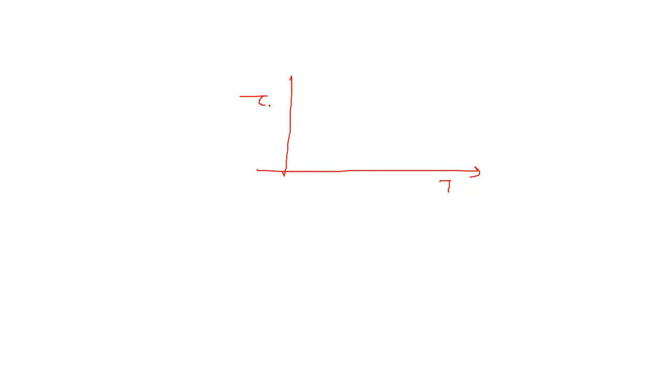One question is there regarding the previous question: if slip does not happen at room temperature, how is the deformation occurring? It's not that slip is not occurring at room temperature. Slip occurs at room temperature, but the number of independent slip systems, I will show you how the tau CRSS changes on this slide. So let's consider a graph where this is temperature and this is tau CRSS. Usually the curve will be like this.

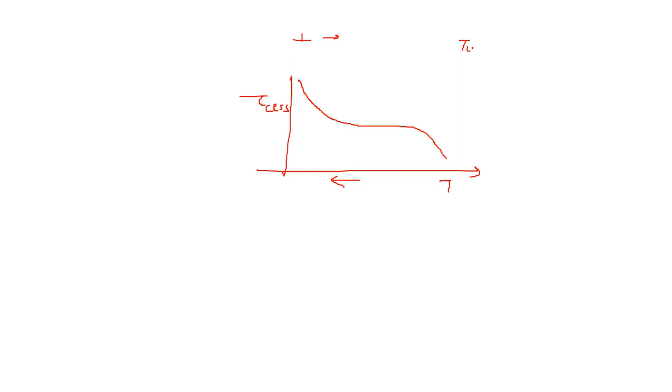So as you go towards very low temperature, I am not talking about room temperature, I am talking about very low temperature, just above absolute zero, like 100 Kelvin or so. What happens at sub-zero or cryogenic temperatures is the tau CRSS required to cause the deformation by slip. There are basically two types of deformation: one is by twinning and the second one is by slip.

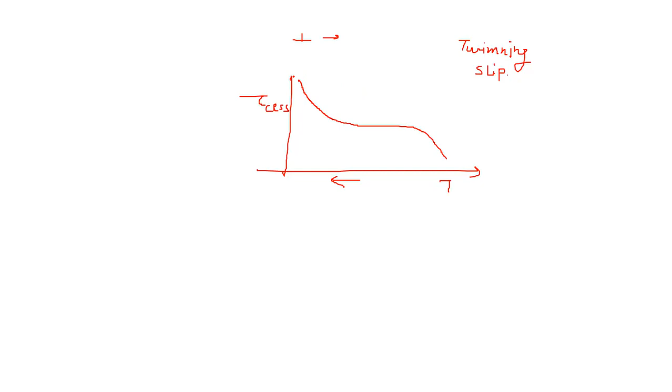Because this tau CRSS is very high, and this is the stress required for twinning, which is ideally flat. At any temperature the stress won't change. So this is tau for twinning, and it is constant. At a particular temperature, tau CRSS is higher for slip than twinning, so the material tries to deform by twinning. As you go on increasing the temperature, tau CRSS falls below twinning. Hence more and more independent slip systems get activated, which homogeneously deform the material.

So the room temperature will be somewhere here, T room temperature. In some materials this crossover happens above room temperature, and in some materials below room temperature. In FCC this is the case, whereas in HCP, let's say in magnesium, you will find more twins in the microstructure, because at room temperature there are not many independent slip systems active, hence another mode of deformation is also taking place, which is twinning.

Hence at room temperature slip occurs, but I am talking about low temperatures, cryogenic temperatures, not room temperature. I hope this is clear.

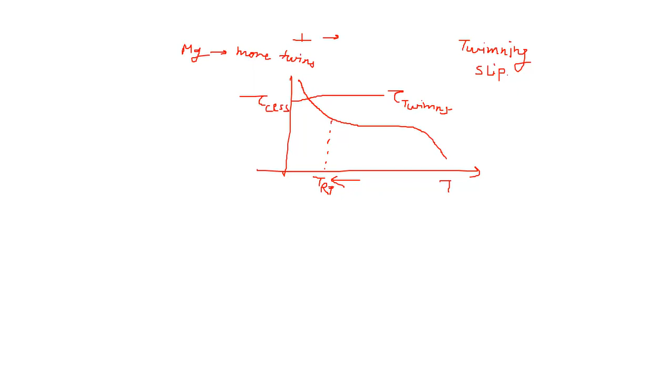Okay, any other question regarding the previous question? Otherwise we will go to the solution of the next question. Okay, so we will go to the solution of the next question, which is on creep. So I think if you are in final year or so, you may be knowing regarding creep, what is creep and everything. Let's again start with this.

This is question number 19, GATE 2016 Metallurgical Engineering. Creep resistance decreases due to: A. Small grain size, B. Fine dispersoid size, C. Low stacking fault energy, D. High melting point. So firstly, what is creep? Creep is defined as time dependent deformation at elevated temperature and constant stress.

So let's say we have a material, we are keeping it at a temperature T and we are applying uniform stress, let's say compressive here. Let's say P is the load applied, which is generating compressive stress throughout this cylinder, and we are holding it at time t. So even if you are below the yield stress, this material after a long time will try to deform or relieve the stresses caused by this load. Hence, this deformation caused by a constant stress at a higher temperature is basically creep.

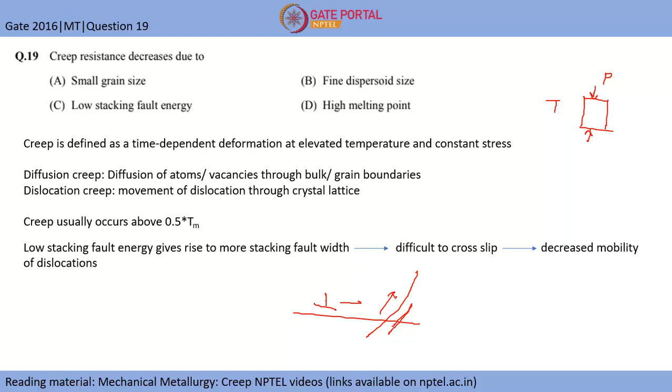And let's talk about low stacking fault energy. In dislocation creep, one dislocation is moving in a certain plane, and it has some hindrance here, so it cannot move. So it can cross slip to another plane and try to slide there. Using cross slip, dislocations try to move away from any hindrance and give plastic deformation by their movement.

So what happens when low stacking fault energy is there? It gives a larger stacking fault width. If the stacking fault width is larger, it is difficult for a dislocation to cross slip. Hence, decreased mobility of dislocations. If there is decreased mobility of dislocations, creep resistance will increase, not decrease, because for creep resistance we should hinder the path of dislocations. Hence, C is also not the option.

Now coming to fine dispersoid size. Let's say we have one dispersoid here, and all of this is a matrix, and one dislocation is trying to move on this slip plane, where it encounters a dispersoid. So it will have some hindrance in its movement. It will try to shear the dispersoid, if you have studied this, or it will try to just go around this dispersoid.

So this fine dispersoid is creating more hindrance to dislocation movement, which is basically increasing the creep resistance. Hence, fine dispersoid size is also not a correct option. And smaller grain size. Let's consider that I have a structure like this, where these are different grains, and one is with bigger grains.

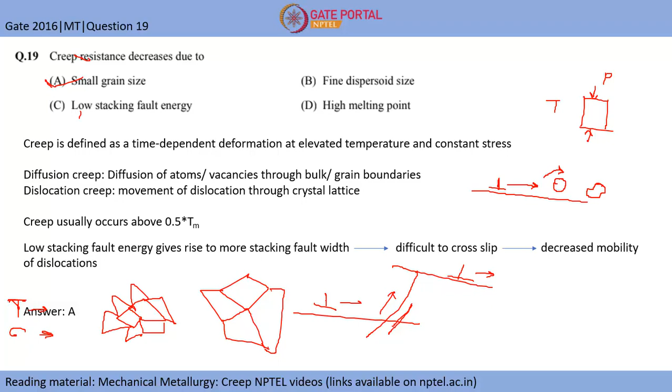This is fine. You have any doubts on this question? What about D option? Okay. Yeah, that's what I was saying. Like D option is high melting point. Let's say I have two materials.

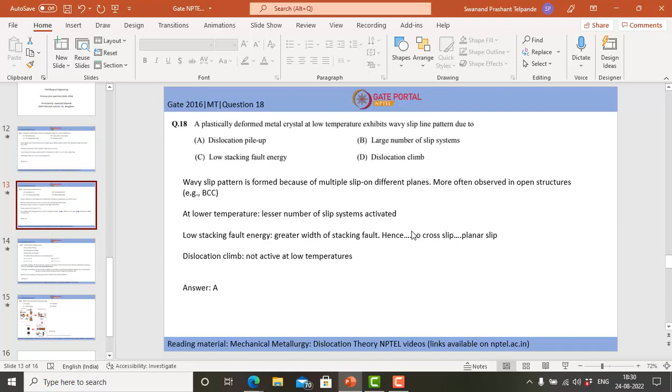Just a second. Are you able to see my screen? Hello? Hello? Yes, sir. Can you see my screen? Yeah, I guess now you can see my screen. Some problem is there. Okay, I will just try to answer verbally.

Let's say I have a 1000 degrees Celsius temperature. Now I take two different materials where the melting point of one is, let's say, 1400 degrees Celsius, and another one is 2000 degrees Celsius. So there are two things. One is creep is basically an accelerated process at higher temperature. So if you consider 0.5 Tm, 0.5 Tm of one material will be 700, and for another one will be 1000.

So if we consider these two materials, according to you, in which material will creep be faster? Where 0.5 Tm will be 700, or where 0.5 Tm will be 1000? Obviously where 0.5 Tm will be lower, let's say 700, because we are keeping both materials at 1000. Hence the higher the melting point, the creep resistance of that material will be increasing at a particular temperature. I hope this is clear. Is this clear, Chintu?

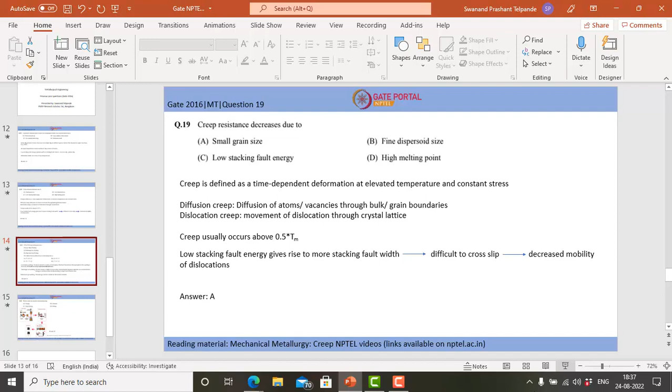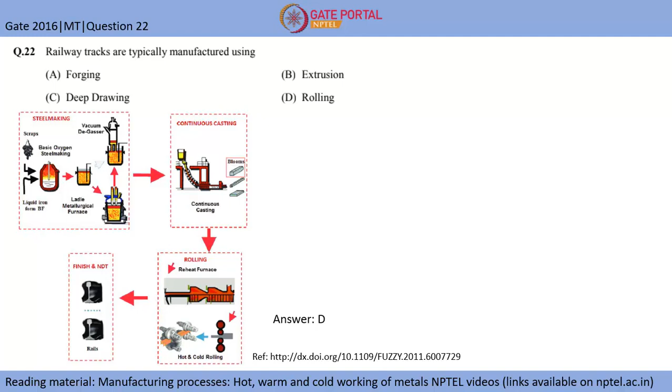Hence the correct answer is rolling, which is the manufacturing technique mostly used to manufacture railway tracks. And many of you have suggested that extrusion is also there. Even forging can manufacture railway tracks, but rolling is the commercially viable process, where you will have designated rolls like this as shown in the schematic, and if you directly pass the bloom through these rolls, the finished railway track will be there. Hence the correct option is option D, rolling.

I hope you could understand this. Yes, extrusion also can be used, but commercially rolling is preferred over all the processes, because if you have a bloom, you can directly pass it through the rollers and just get a complete railway track out of it. In extrusion you have to have a die of that shape, and then you have to pass it with a lot of pressure, so it will be a more energy consuming process than rolling. I hope this is clear, because many of you guessed B, extrusion, as the answer.